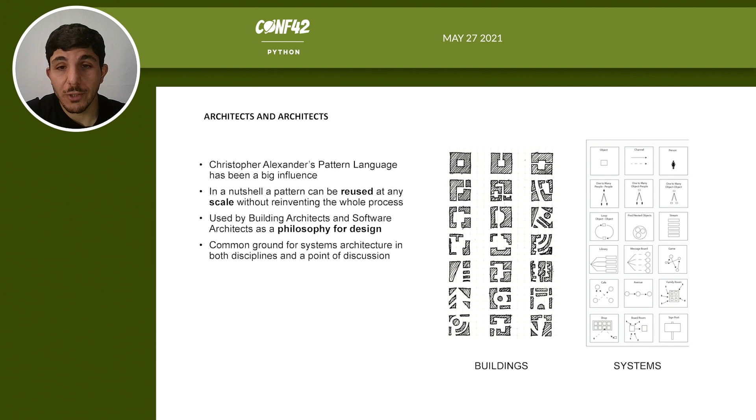It's a philosophy of design. It's influenced me, a lot of other designers out there, and programmers worldwide. So if you're thinking about what this is, there's actually a lot of common ground. These aren't two separate things altogether. They provide different outputs, but they're very similar.

And a quick history lesson of how architecture works. Historically, you would think architects are drawing pictures all day long that can create the design. And you keep going through that process of drawing, updating drawings, getting feedback, creating the modifications, getting more detail in your design. And in the past, you had anywhere from a few dozen drawing plans to a few hundred.

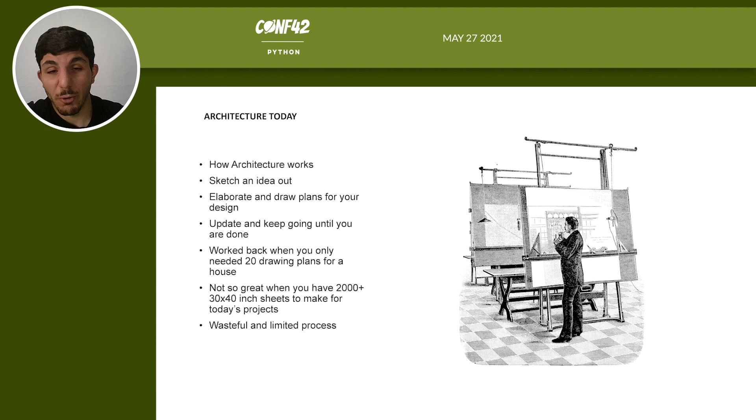Now you need thousands, literally thousands. I've worked with construction document decks of thousands of documents. It's a wasteful and limited process. It's kind of outgrown its use. So people are moving into different ways to work, and that's where computer technology comes into play.

This is just one example of some computational design. Computational design is basically using computers to help you create a design based on your inputs and parameters, and working through that with the aid of a computer, basically not possible with a human hand. So this has been utilized a lot by architects over the last decade or so.

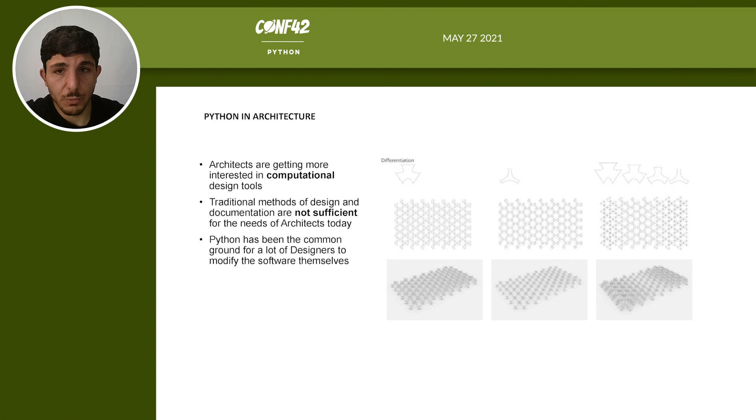And traditional means of design documentation are not sufficient. So we're trying to do something more sophisticated like this without spending 100 years trying to draw it and document it and make it a functional, constructible building. And that's where Python comes into play. Something as simple as just creating geometry with code and scripts, just simple scripting, has gone a long way.

In this example, you can see here that we create a bunch of points as a diamond shape. The points are then connected into planes, and then you could take this one shape you created and multiply it. Now from there, you can get much more sophisticated, but you can see the starting points if you're using the code. And this is in an example called Grasshopper and Rhino. It's a general purpose 3D modeling tool.

And it's gotten a lot of traction. This is what more designers want to do. They want to create elaborate concepts in design and make it constructible, but they don't want to be limited by the software and technology around them. So this has been the starting point over 10 years ago with a lot of architects.

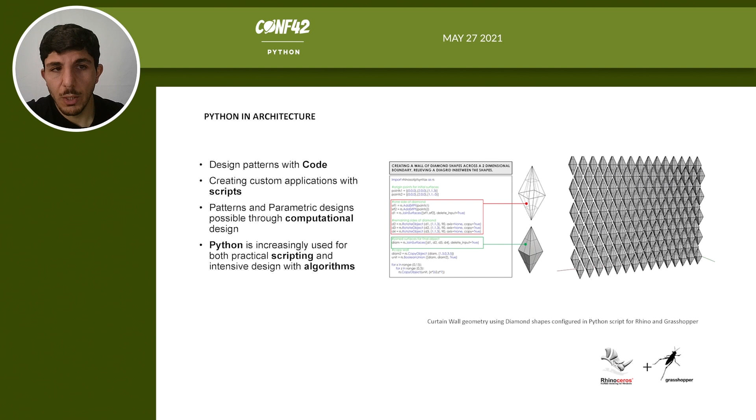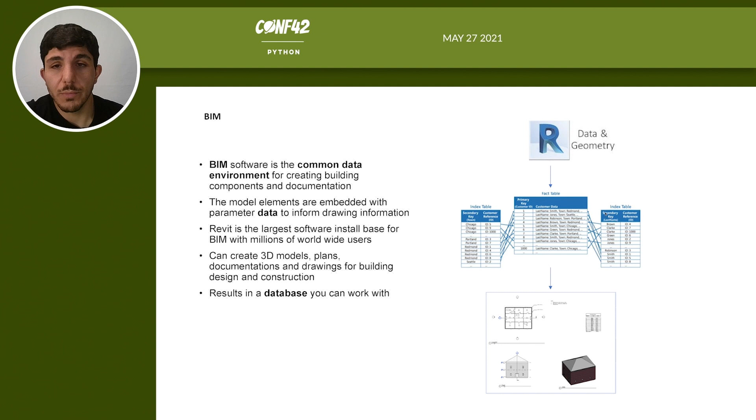And we also use a system called building information modeling. The idea is that you can combine a 3D model with a database, a relational database that has content like the size of a wall, the height of a floor, whether it's concrete or wood, what have you. Keep it in the model, keep it all together, and from there, you can use it in your drawings, so you have more information embedded in your drawings. It's been a big time saver because you have a database. But we also want to work with this information, again, not be limited by the software.

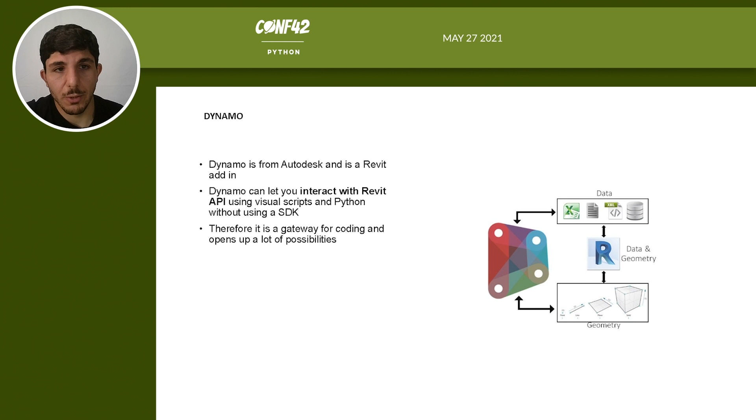One use is Revit. Revit has an open source tool called Dynamo, this big old colorful shape in the middle, which can help you automate the process of adding data and geometry to the model, so you're not trying to be a monkey and run through everything yourself. And this is an example of Dynamo. It's a visual scripting medium.

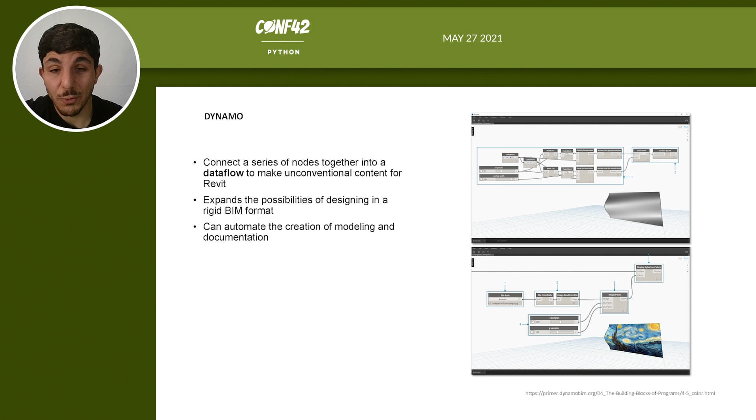It's low code. You can do cool things like create this curvy geometry through a data flow and then add like an image to it. It's very fun to do that kind of stuff and explore this way. It's not something you can really do with the Revit software on your own. And I've been using it, for example, to create towers.

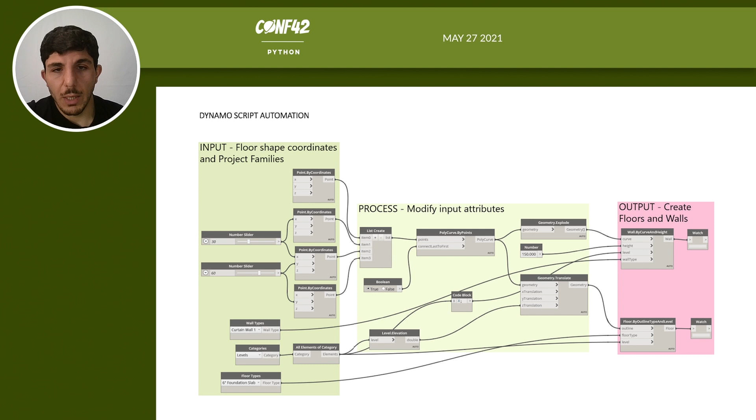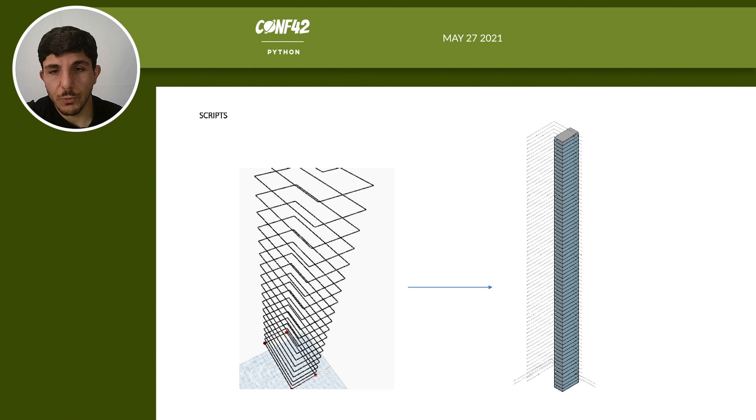And Dynamo with all this visual scripting was my gateway into programming. But sometimes you want to do more, and my gateway into Python programming was the Python node in Dynamo that lets you do much more with fewer steps. And once I discovered this, I kind of fell in love.

You can do something as simple as taking a geometrical shape, like just a basic rectangle with a length and width of 100 feet, and through a couple of variables setting the origin and rotation axis, you can iterate through the rotation using floats and a set degree and just create a twisting tower. You could do this in the visual scripting format, but it takes more steps and may not be as fluid.

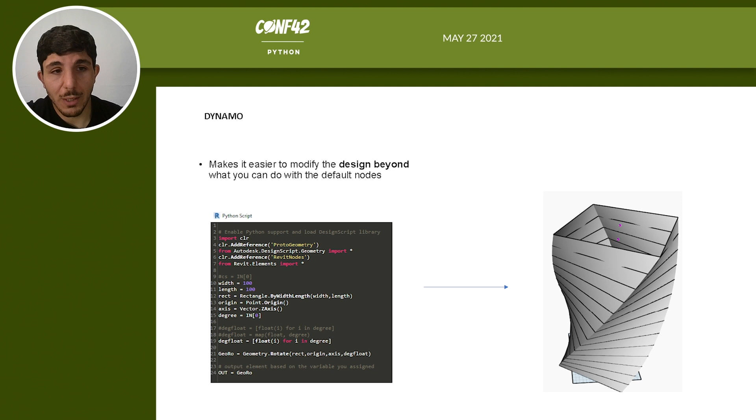But I could take something as simple as a script in Python in this visual scripting medium and create some great shapes. So this is what's been releasing a lot of efficiency and benefit for designers using just Python, very, very simple Python I could teach a child. And this is something we'll grow with here.

And on top of that, we have another great tool called Blender. I think more of you have used it. It's a different software platform than Rhino and Revit. These are all completely different products from completely different companies, proprietary and open source like Blender, and they're all using Python. Blender supports Python. It has a huge user community, and it does a great job using a system called meshes.

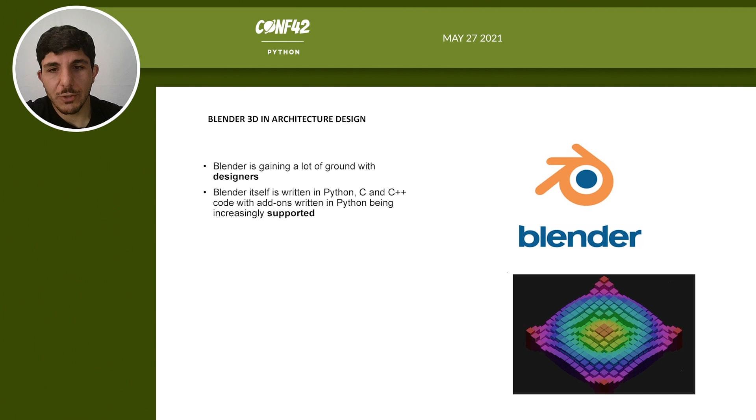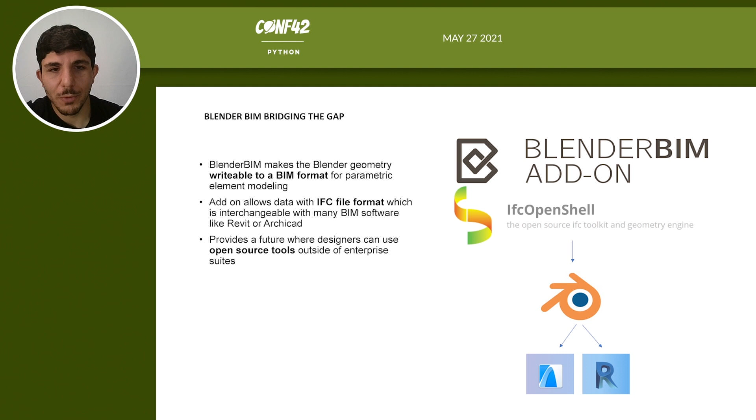It's not data, it's mesh, but there's a new add-in called Blender BIM, which takes that building information modeling database format with parametric modeling, and an open source format called IFC, to take the free to use Blender tools with these integrations to create your geometry, then push into a proprietary format like Revit or ArchiCAD as BIM models, which to me in my world is like candy. This is amazing that I can open so many avenues of design and configuration. And it's so free floating.

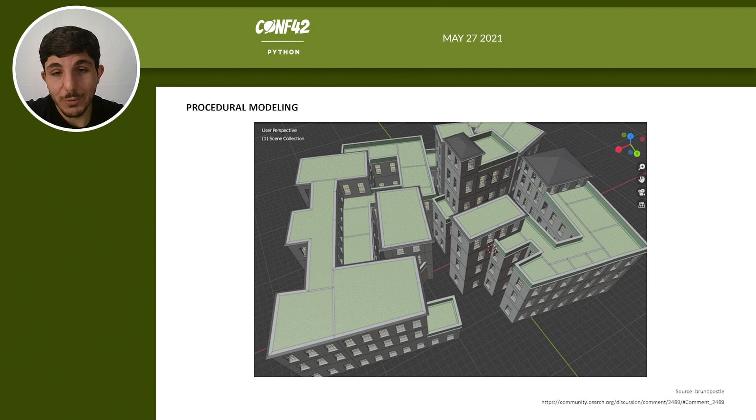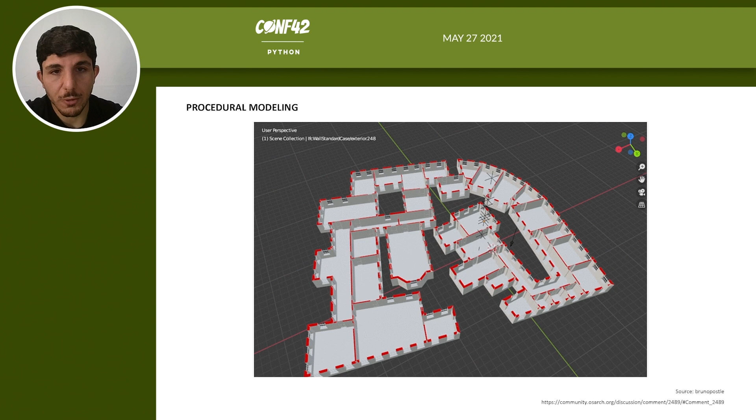From there, this is what it looks like basically. In Blender, you create a series of meshes, then volumes, and then you attribute shapes to it, and you can put components like windows and doors through it with the Blender BIM add-in. And in very few steps, you can go from just some basic massing to a full building section and floor plan, see here. And this is all possible thanks to contributors in the space of both Blender and Python and the growth of information in the built environment.

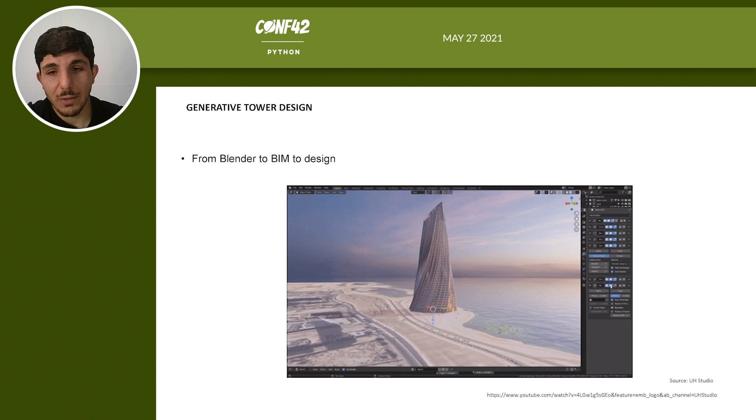And you can eventually take it and create something like this, a skyscraper, which is kind of the whole point of this talk: how we can get architects the tools they need to design faster and better, to get better results and the design they want. They're architects, very open-minded people, but at the end of the day, this is what they want to do. They want to design, they want to make the most compelling kinds of work.

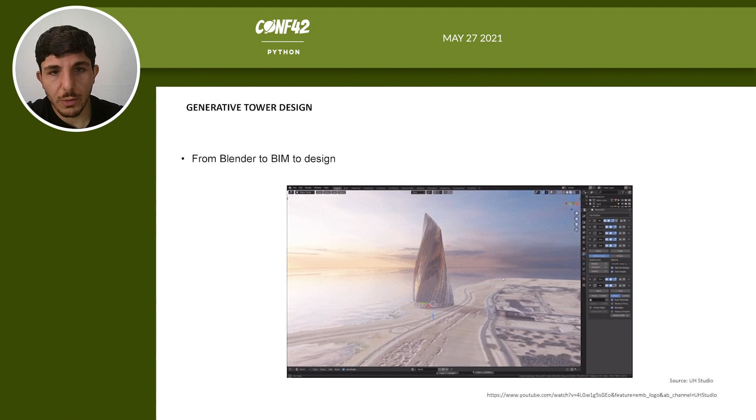And all these tools the Python open source community has been making possible over the years. Another great example is designing with a lot of thought in mind, and these days environmental design, sustainable design is big.

We have another great contributor from the Python community called Ladybug Tools, which can run in any geometry engine from any of the examples I showed before, all written in Python. Pip install lbt-ladybug tools. It's really cool.

In this case, you're seeing the sun kind of canvas overhead, and we can get a sense of how much light's in the room. Really useful, especially in this visual scripting stage I showed you earlier, that you could just design your room. You don't have to export to another software.

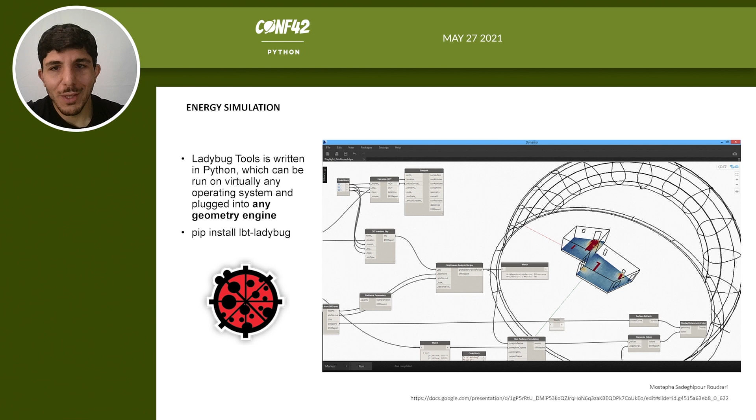It gives you some great results, it gives you some options. It goes through a lot of neural networks to give you options of what's possible with the results, and helps you narrow down the definition of what you're trying to find in the most balanced room for light and energy, and pick a few from there. If you're not super savvy at a high level, you can still make some good decisions.

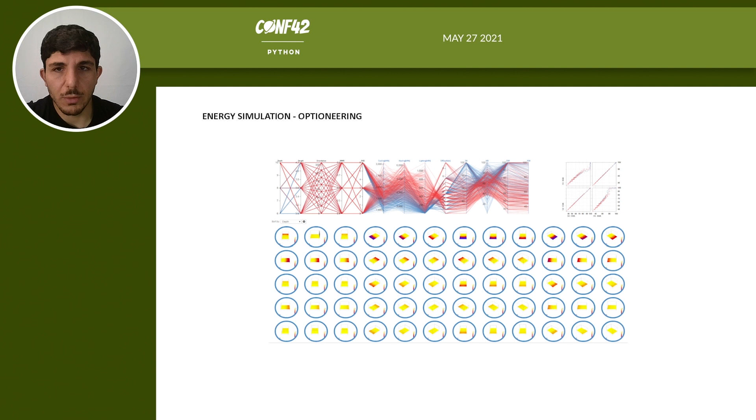Another tool from that same developer is called Honeybee, which helps you visualize spaces for daylight and energy analysis. This is going to be a big win for people designing spaces.

You can imagine this being a single floor of a 100-story building. And if the building is oriented north, this energy study holds up on every floor, because the sun's going to come in the same way, assuming there's no shadows, for example, blocking it.

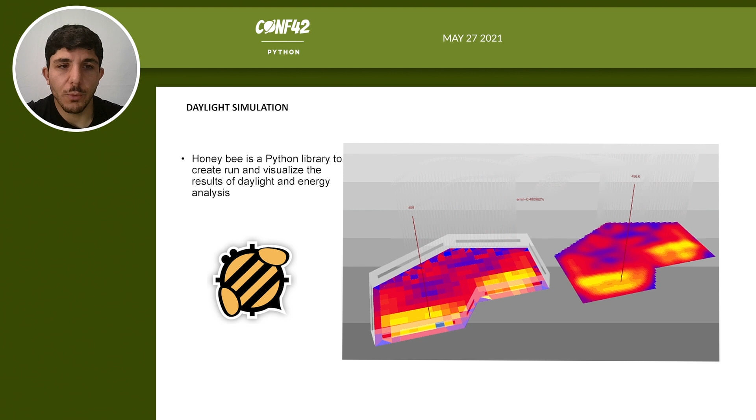So these are the kind of tools that can be useful in a very fast way to get great results, and they're all free. We could take that, and instead of just having these one-off designs and leaving it done when we finish the project, we can study the building.

So now we have live information feedback in the built space, because we have something like Python to collect this data as an energy model and export it in a straightforward way, so we don't have to just assume it's working okay per design. You have to always check it.

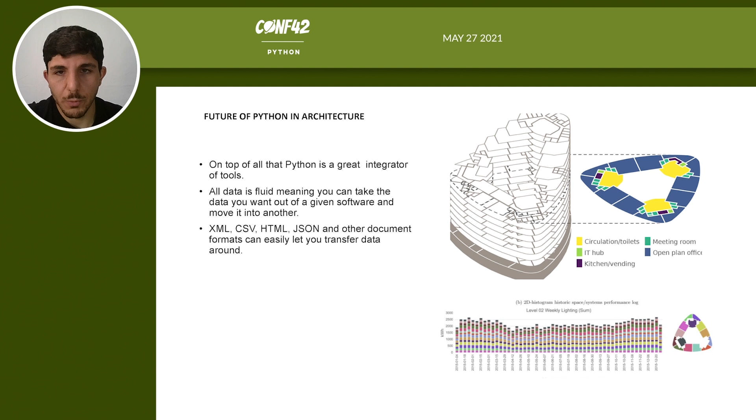This is kind of the growth of Python in the future. It'll be a great tool for integration. You can use all sorts of data formats like XML, CSV, HTML, JSON, the BIM models, the design models, everything, and put it into Python. From there you can get data frames with pandas, do energy analysis or data analysis and visualization with matplotlib or so many other packages and libraries. This is where Python becomes the glue between different kinds of efforts in the built space and design space.

And again, I want to reiterate, Python makes it possible. It used to be that architects were kind of beholden to proprietary formats and corporate expectations of how you work. This has really opened floodgates for us to work more fluidly.

And I thank all the contributors here, special thanks to everybody here. These are all open source tools. Some of the other software is proprietary, but everything you see here is effectively either open source and primarily Python, developed by open source contributors. So a big thanks to everybody on this list and the Python contributors out there everywhere. Whatever you do makes a big difference. Your software is being utilized in ways you wouldn't expect.

So I'm going to keep shouting from the rooftop about how we can design better buildings at a large scale, small scale, any scale with Python tools, and just hope we get more traction.